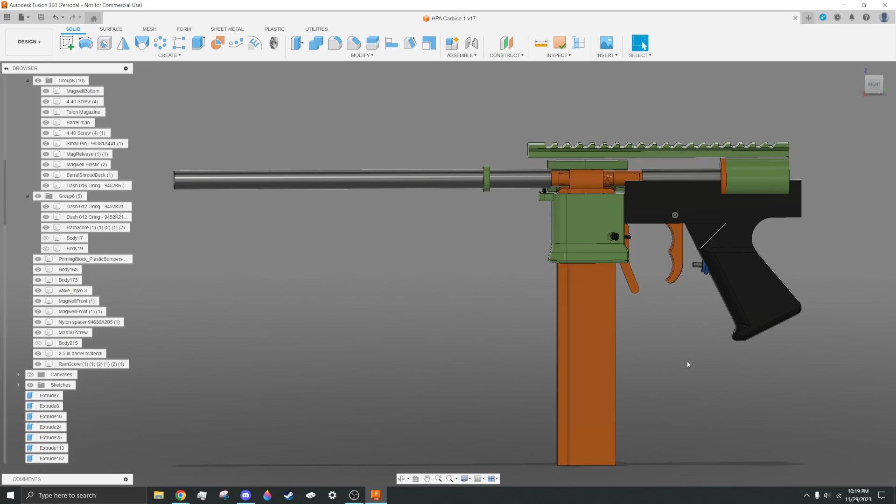Hello, HPA. This is Roboman's new Nomad air tank, and I'm working on a semi-automatic pistol that uses it.

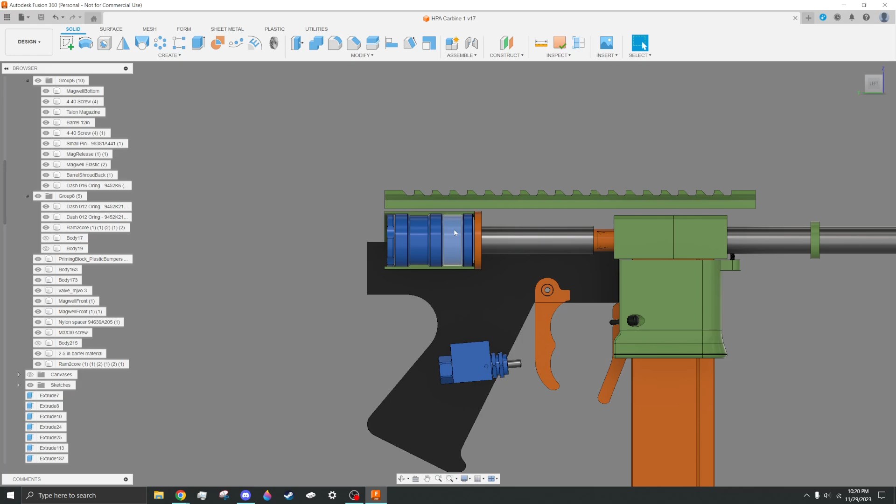The Nomad air tank is slightly different from a traditional hobby-made air tank like a Sniper Core or a Spec BZ. This one's smaller, and it doesn't have an automatically pushing breech ram built into the air tank. So in order to use this tank, you need to build a breech mechanism of your own.

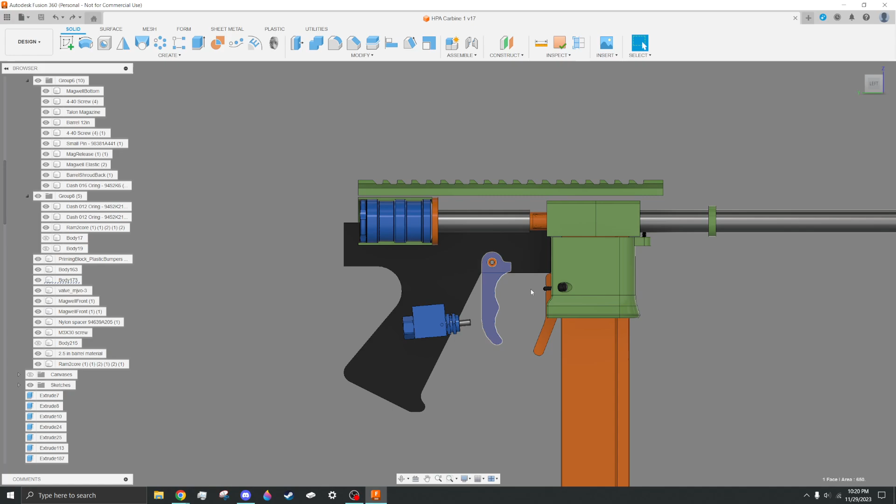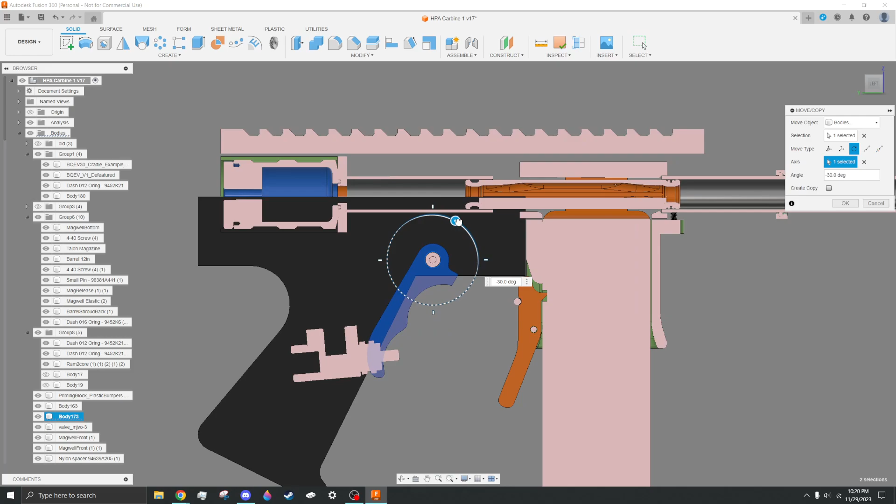I've decided to try and make my breech mechanism actuated by the trigger pull itself. If I split this in half, you can see you've got your barrel up here, your ram here, this little extra bit of barrel in the back, and then the trigger right here. This bit is going to do that sort of thing, and when it does, this is going to go back and forth about that much. I'll probably have to use a lever or a set of gears to do that.

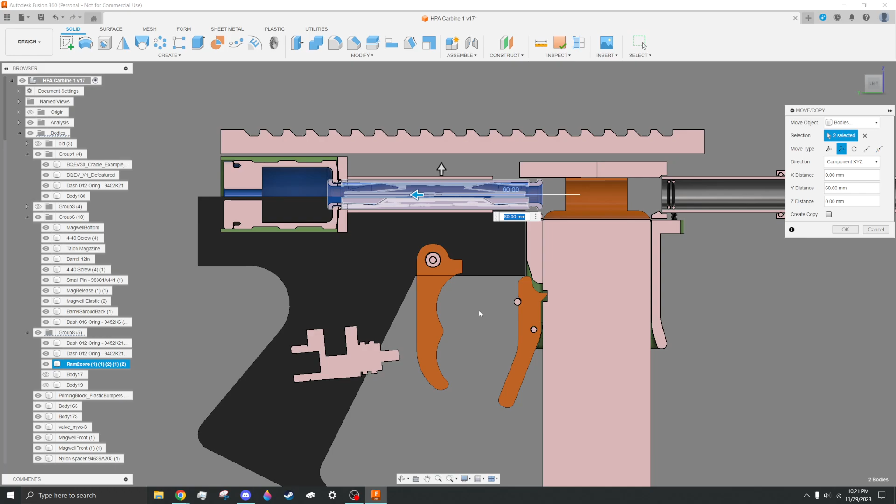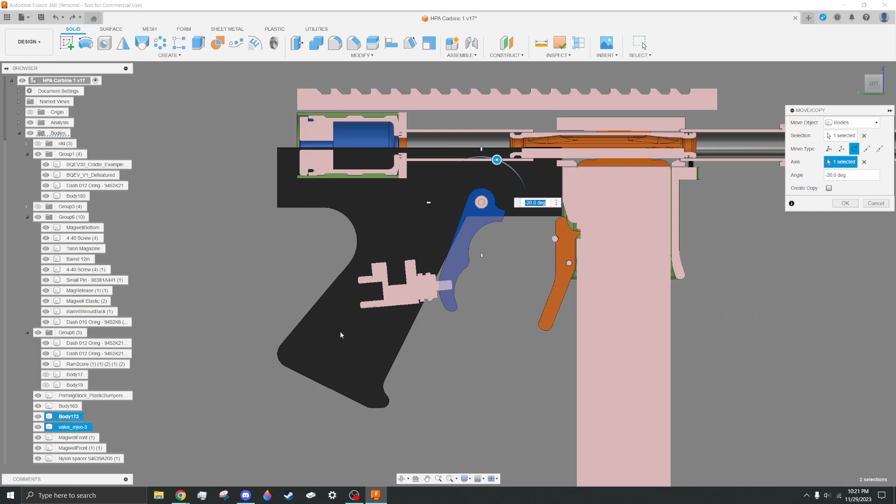Basically, when you pull the trigger, the ram is going to be by default in the back position. As you pull the trigger back, the ram moves forward, chambers a dart. By this point it's already moved forward and chambered a dart, and then the valve for the air tank triggers, air flows out and shoots out the barrel. Hoping that something like this works, because if it does, it can be a really compact little blaster.

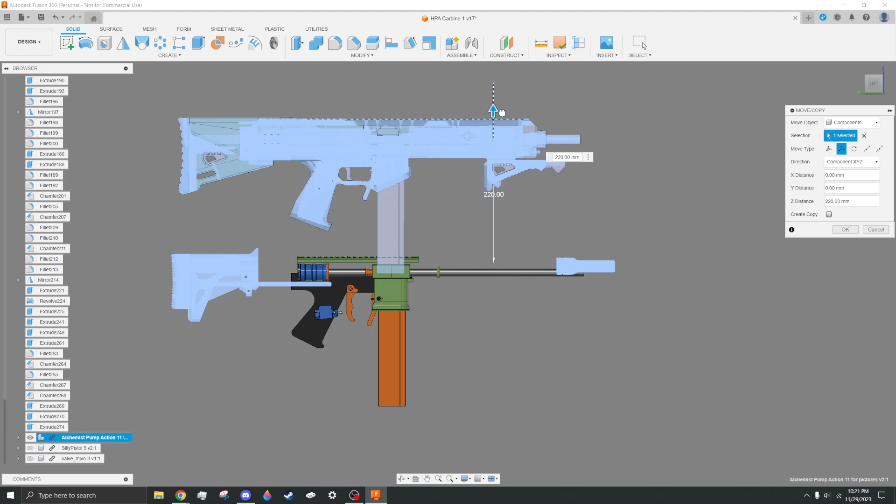If I have a reference point, here's an Alchemist. There you go, and this is with a 12-inch long barrel, which is probably too much, but there you go.

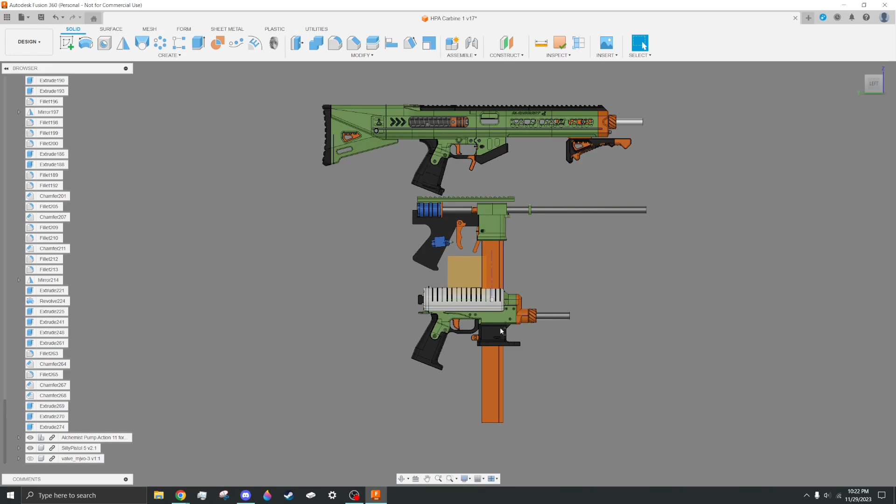And then here it is with a Silly Pistol. There we go. So it's very comparable in size to those two, or to a Silly Pistol, sorry. Very comparable in size to this, and a lot smaller than that. And it's also really thin, really, really thin.

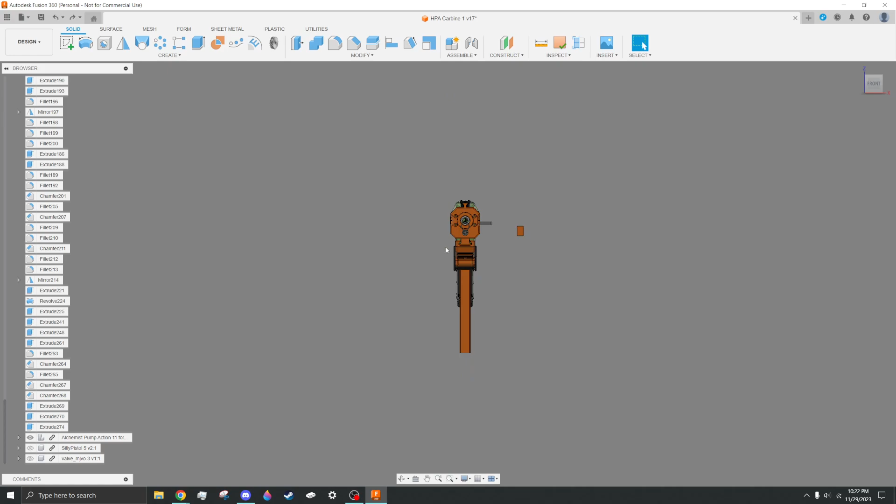So yeah, something like that should be pretty fun. Looking forward to working on this some more.

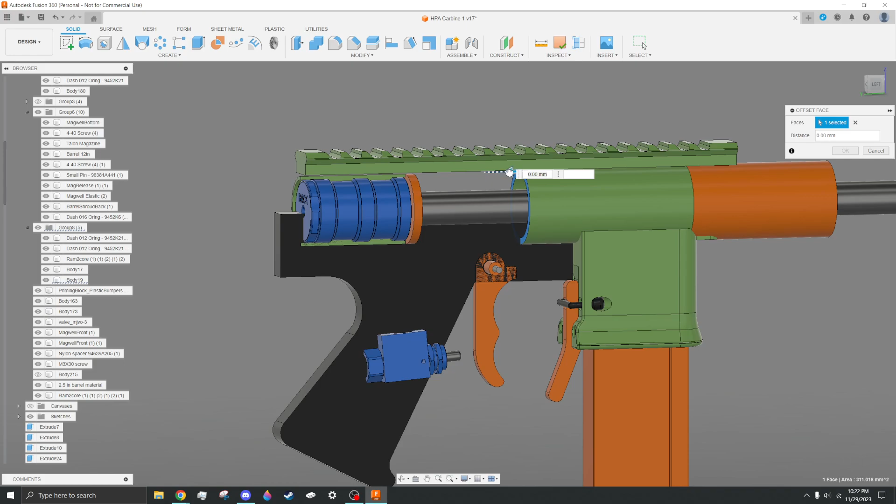Here is actually, there we go. There's some more of the body shape. This should actually be extended back as well. Here, there you go. So that's more or less what this is going to look like in its current form. So yeah, something like that should be a lot of fun, and I'm looking forward to working on this some more.